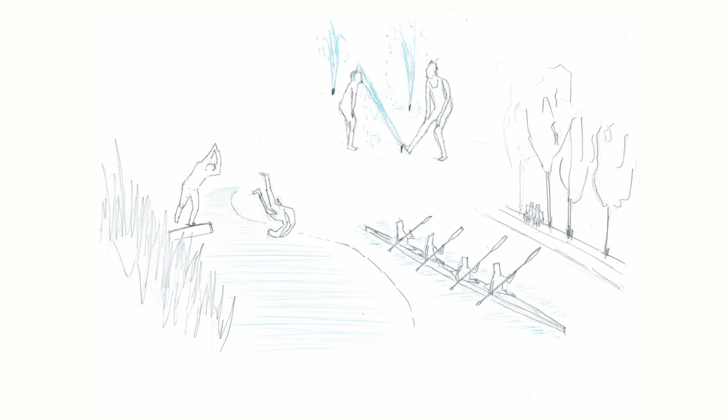Hello, my name is Philippe and my hobby is kayaking. What I like about this sport is the relationship with nature. It gives me a free and relaxing feeling. There are many different kayaks, used for competitions or for a trip. I like doing this sport because I can put my energy into it, and it has a cooling effect in tropical temperatures. Finally, it's also a team sport that you can do with other people.

From my fascination, I started looking at the recreational aspect of the water. The Campine Plateau has been subject to climate change in recent years. As a result of temperature increase, people have a greater need for cooling.

Tropical summers have increased the pressure on the use of swimming facilities. Natural areas are used for swimming against the wishes of the towns. Also, in tropical temperatures, more private swimming pools are filled with water.

The location of the public swimming pools in the Campine Plateau is around urbanized areas such as Genk, Maasmechelen, and Houthalen-Helchteren. The centrally located smaller villages on the Campine Plateau do not have a municipal swimming pool.

More and more private swimming pools are being filled, while the Flemish water company, the Watergroep, advises against this because it will further dry out the Campine Plateau. With my project, I am trying to deal with this problem.

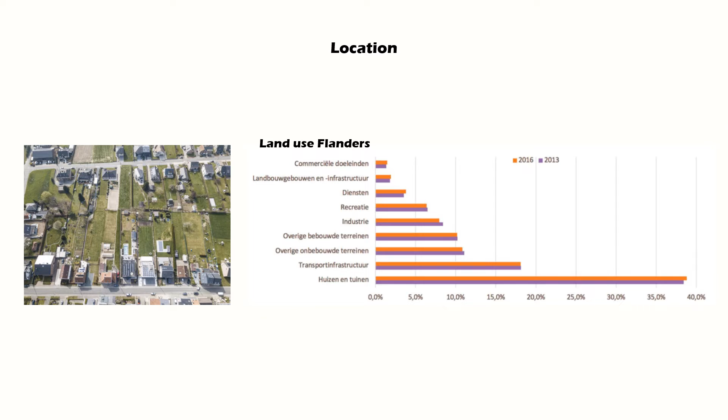The size of these private pools has also grown over the years. In the past, bathtubs were used for cooling down. Now it's even possible to build an indoor pool in the house.

These pools are filled with drinking water from the tap. Because the drinking water comes from the groundwater of the Campine Plateau, the groundwater table will fall as a result. The increased volume and size of swimming pools will intensify the process.

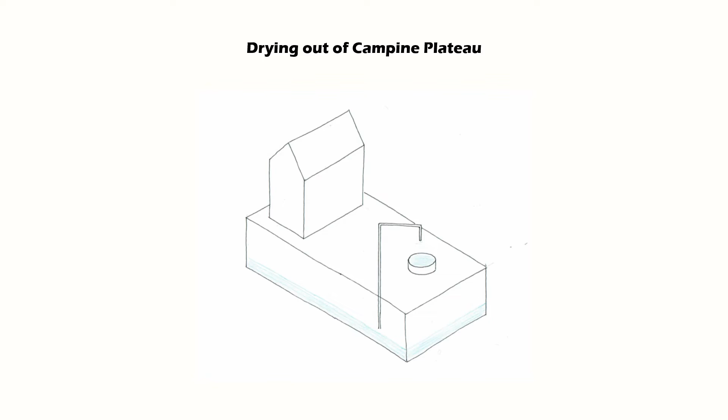To deal with this problem, I would like to introduce the swimming house. In this house, the pools are only filled with rainwater, and the collectivity makes it possible to build a bigger pool for everyone living around it.

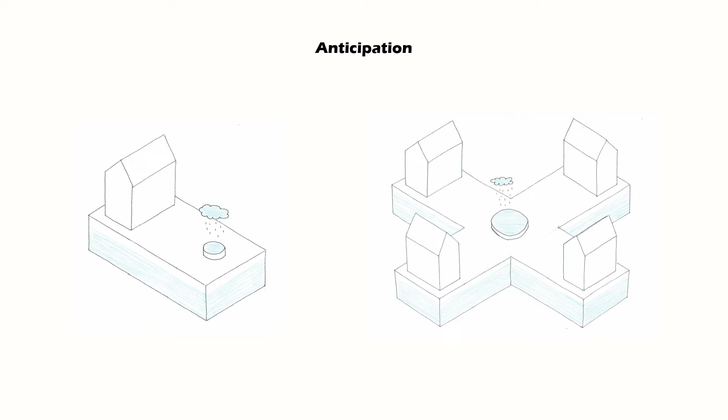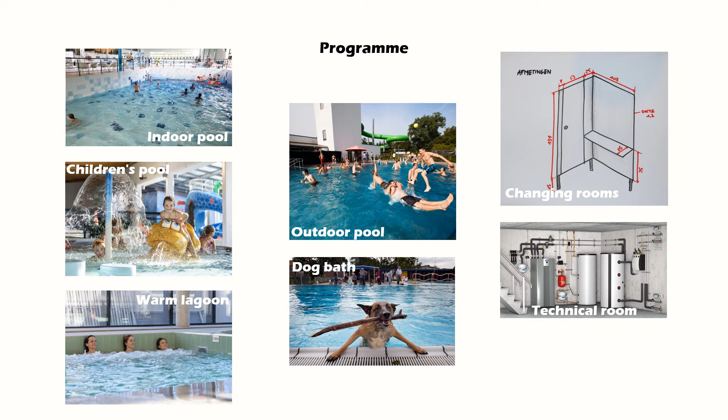Since young as well as old people are present in residential areas, the program also takes this into account. A children's pool for the little ones, but also a warm lagoon for the older people. In addition, there are a large indoor and outdoor swimming pool and also a dog bath.

For the integration of the swimming house, I was looking for places where there are many heat waves and vulnerable institutions. Also, because the rainwater is buffered, local watercourses can be spared from flooding during heavy rainfall.

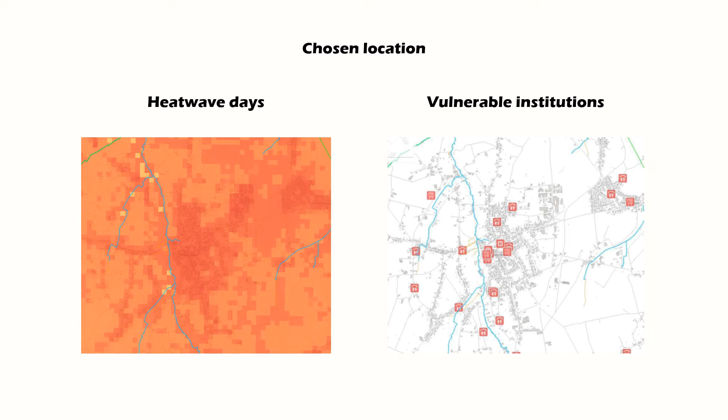The sequence of backyards is important for the functioning of the swimming house. In this typology, the backyards border on one common path with small gates. The houses are connected to the path.

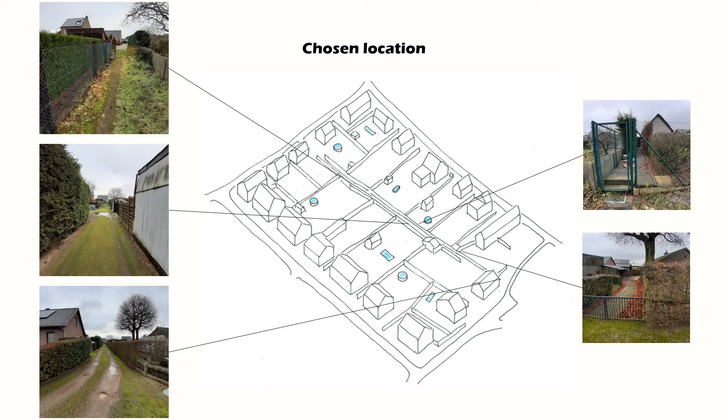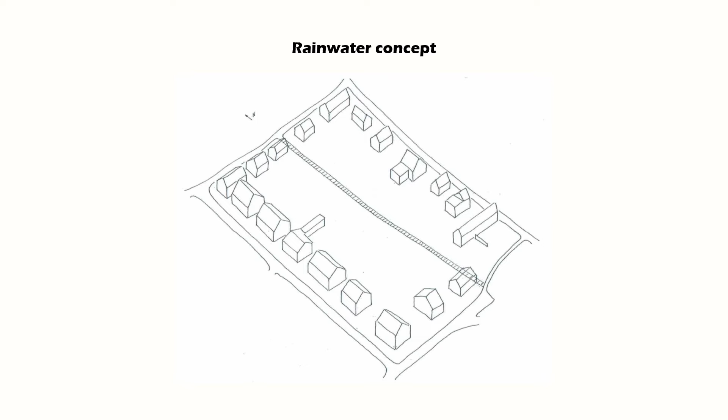For the swimming house, I used the common path as a sort of red guideline for the further development of the design. This way, the old abandoned path will become a social meeting area for surrounded neighbors. The swimming house, which is centrally located, initially contains indoor pools.

These are fed with the rainwater that flows off the roof. Inside, the water is filtered, and, if necessary, heated. This makes it possible to use the swimming pool all year round.

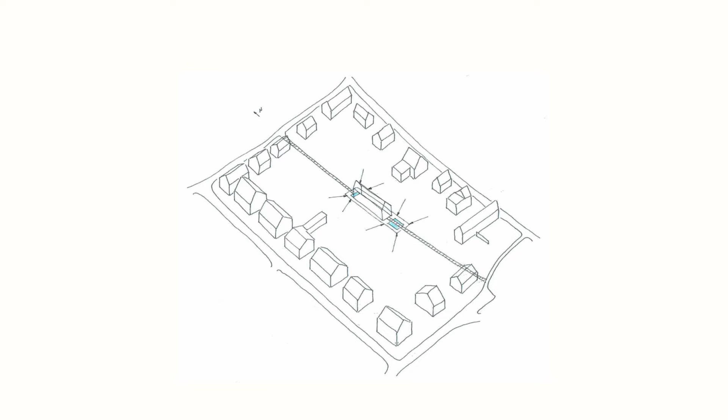The outdoor pools are fed by the rainwater that flows from the surrounding backyards into the wadi. When these pools are full, the wadi provides for infiltration into the ground. The rainwater is buffered and cleaned with reed filters.

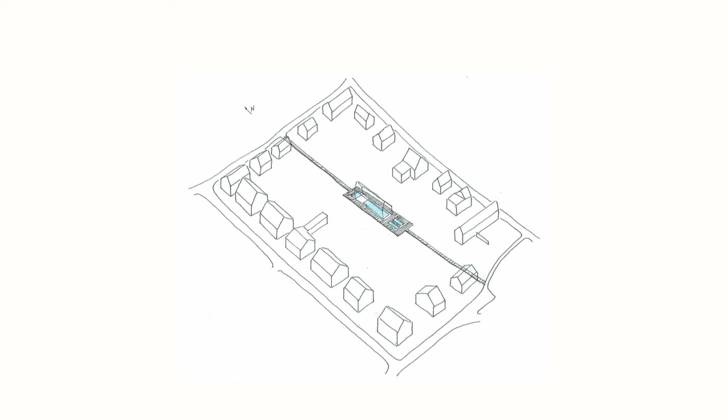A wooden deck above the wadi ensures that the swimming house is accessible. The wooden deck and the house also reduce the evaporation effect because there is a reserve buffer under each pool. Water remains available even during dry periods.

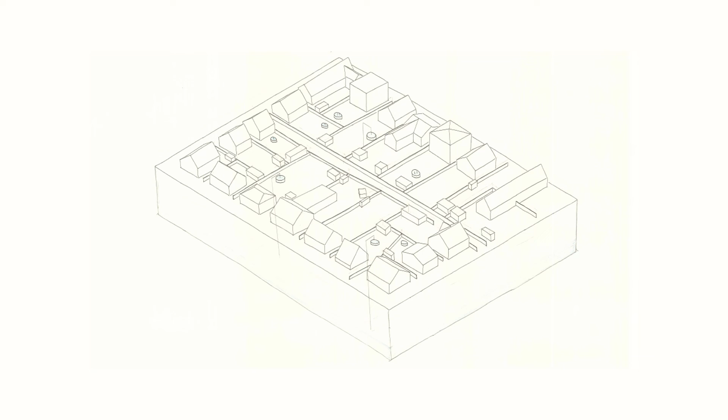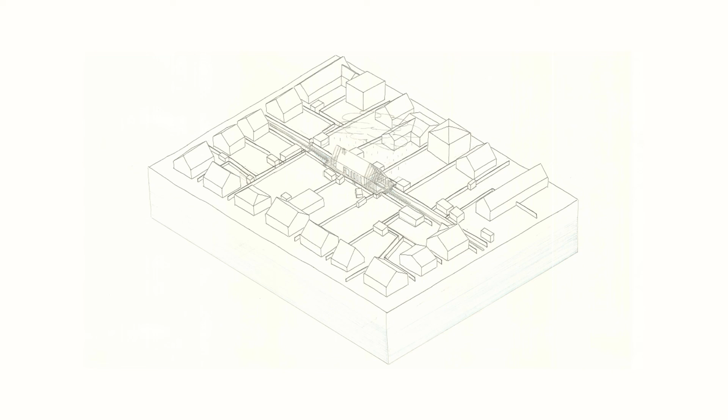Parceling typology can be found in various towns. It's necessary that there are enough backyards bordering the swimming houses. I have also chosen regions where there are few or no swimming facilities.